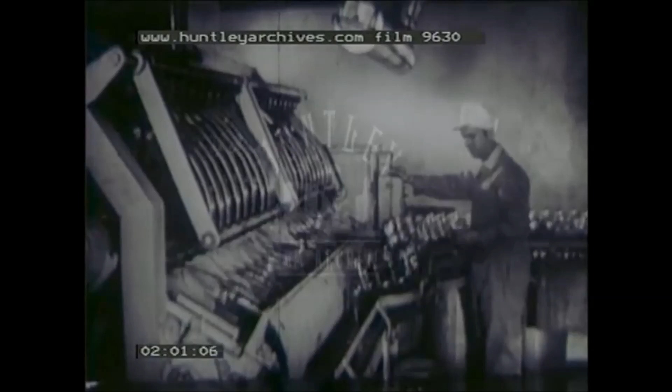The washing up that goes on in the house is magnified to huge proportions in places such as multiple dairies. Just as Mrs. Jones's washing up water goes down the sink, so the water that washed 10,000 bottles goes down the dairy drain. And so it is with industry in general.

Trade waste presents a stern problem for the public authority in charge of main drainage, for some of it is harmful and dangerous. From breweries, engineering works, chemical and dyeing works, the waste from the various industrial processes runs away down the factory drain. These flows from factories are larger than those from houses, but they all find their way into the same sewers.

When any building is erected, whether to live in or to work in, drains are laid leading to the sewer under the road.

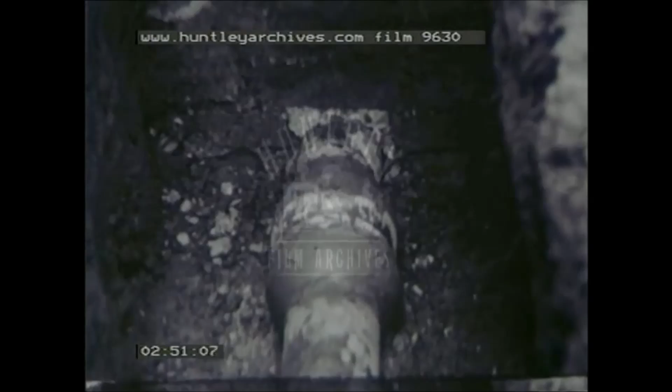Some sewers lie near the surface. Others are very deep in the earth. They run across country and under city streets, man-made rivers in tunnels of brick and concrete. Small local sewers flow into larger ones, and the wastewaters of a whole district move as tributaries towards one great stream.

As in natural rivers, the streams vary in appearance and rate of flow. At times of great activity, the sewage runs deeper and dirtier. On Mondays, there is the soapy evidence of wash day. From the first small drain down to sewers larger than a tube railway, like this one, the unwanted wastes of the world above the street are carried safely away.

In the county of Middlesex, the local authorities were faced with many problems. It became increasingly difficult to provide proper drainage facilities for the ever-growing population.

This is what happened to West Middlesex. Occupying two-thirds of the county, it contains within itself no less than 15 local authorities. The population in the area more than doubled in 15 years.

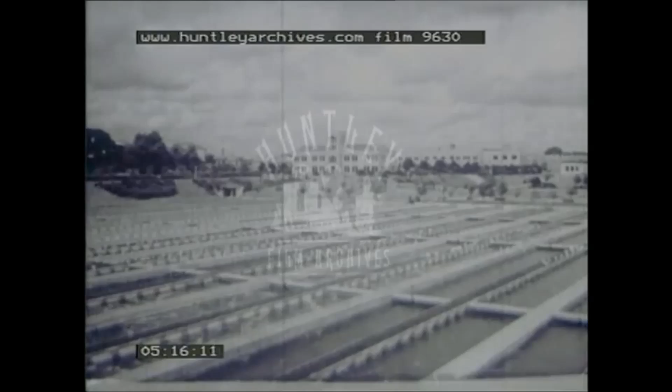Mogden, one of the largest and most modern purification works in the world, was completed in 1936. The average flow treated is over 60 million gallons per day. In wet weather, the works could take 600 million gallons in one day, a volume that would flood Hyde Park to a depth of 5 feet.

Sewers lie at different levels according to the contours of the land under which they run. One stream of sewage arrives at Mogden 60 feet below the ground. From the deep sewers, the flow arrives here and has to be lifted to the surface by pumps.

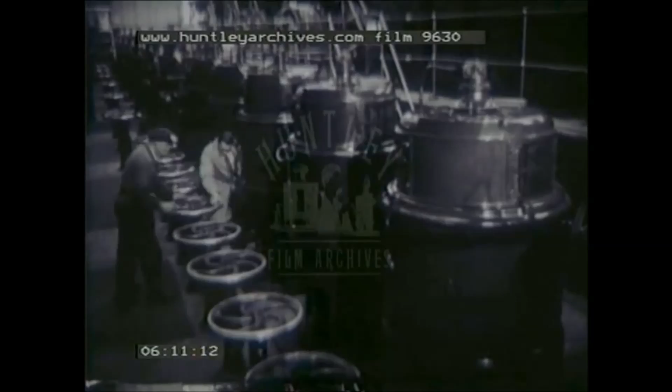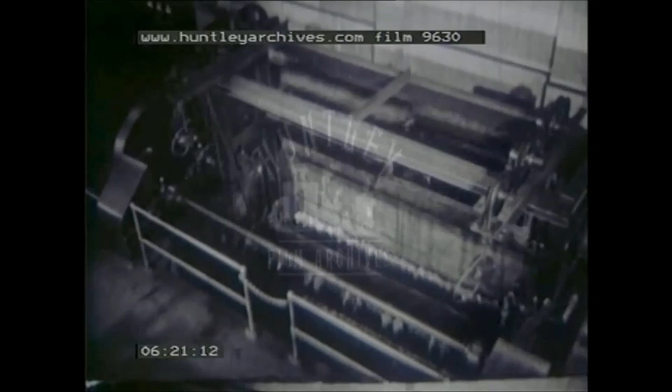It joins another large stream arriving at surface level, and both pass forward to the screen house. Here, rags and other large refuse which might choke the plant are sifted by screens. The electrically operated rake lifts the refuse to the top of the bars. Brushes sweep it onto a conveyor belt, which carries it into a machine where it's chopped into small pieces and passed back again into the sewage.

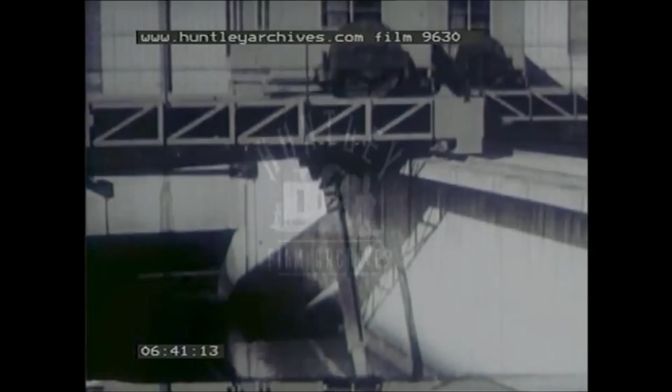The flow then moves on to grit chambers, where the speed of travel is reduced. This causes the sand and grit in the sewage to settle on the bottom in a fairly clean condition. The grit is removed from underwater by suction through a pipe traveling along the bottom, and is transferred to channels like this.

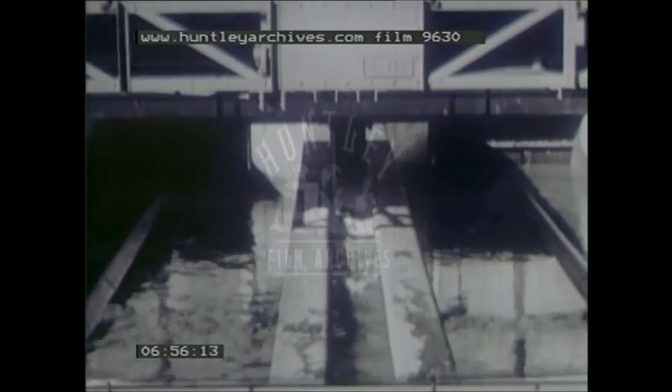60 million gallons a day. The sewage from a population of well over 1 million people now flows on for treatment.

Here, the first sample is collected for making chemical tests. This is necessary to ascertain the amount of impurity present in the sewage, and for the purpose of keeping a close watch on waste products discharged from factories.

In wet weather, the flow into Mogden increases in volume, but the works are constructed to deal with these heavy storms. Most of the rainwater that falls in streets in this area is carried away by surface water drains, straight into streams and rivers. But some of the more dirty rainwater is taken into the same sewers as ordinary sewage, and arrives here.

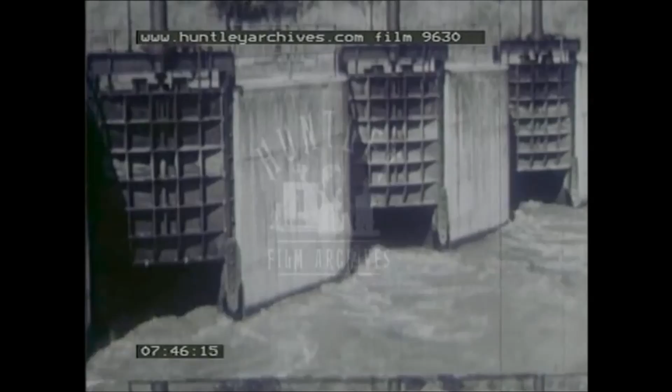The normal flow moves along the first channel. After heavy storms, excess water flows over the weir and is bypassed through this other channel for treatment in stormwater tanks.

These stretch away for a quarter of a mile.

The normal flow moves through culverts to other tanks known as sedimentation tanks. Here the sewage passes through very quietly, and just as mud settles on the bed of a river, so solid matter settles down on the bottom of the tank in the form of sludge.

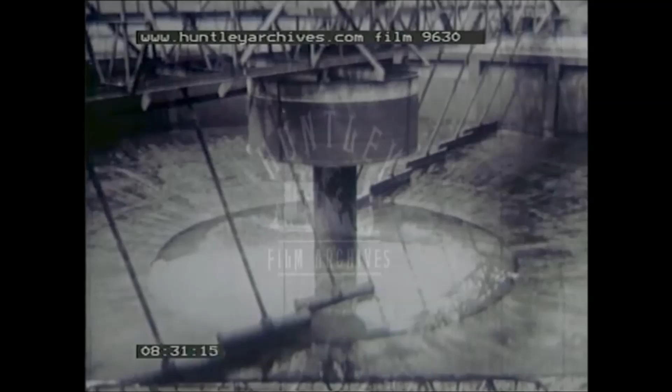This sludge is removed underwater by the machine. With an empty tank you can see what happens. The machine revolves slowly and scrapes the sludge at the bottom in towards a central well, from which it's pumped away for disposal.

The heavier solids are taken out in this first process, and now the water's passed forward into larger tanks, where the lighter solids slowly sink to the bottom. It's a gentle and leisurely process, and the machine which scrapes the bottom hardly ruffles the surface.

The large blade is lowered through the water and draws the settled sludge into hoppers at the end of the tank, and the sludge is pumped away.

These two stages of sedimentation remove rather less than half of the impurities from the sewage. Samples taken at this point show a liquid that is still turbid and dirty looking. Before the water can be discharged into the river without causing a nuisance, it must be made much more clear and pure.

To complete the purification, wonderful assistance is given by minute organisms, bacteria. The bacteria used are similar to those found in good garden soil.

Many years ago, sewage was purified on farms like this one, where it was distributed over large areas of land. But thousands of acres were often turned into unsightly, bad-smelling marsh.

Science and research brought improvements, and by about the year 1900, filter beds had been developed. In these beds, conditions are provided where friendly bacteria can thrive and make use of oxygen from the air to purify the sewage. This scientific principle is behind the activated sludge process, developed in more recent years.

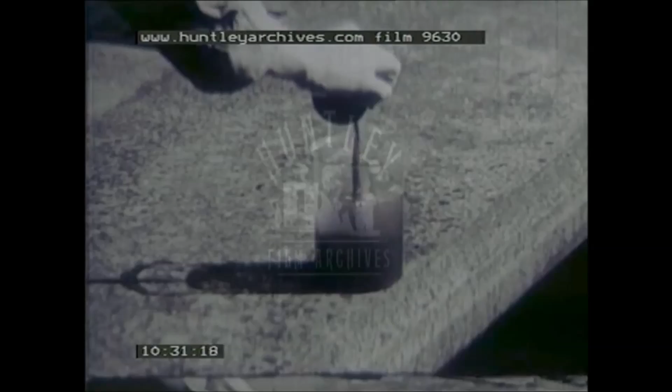Into the sewage is discharged a quantity of specially prepared activated sludge. Here's a small sample. A thimbleful contains thousands of millions of the living organisms.

In this mixing channel, this activated sludge is pumped into the sewage. The mixture then passes through channels, and it travels about a third of a mile in 8 hours, or about a yard a minute. During its journey, the mixture is continually aerated by small bubbles of compressed air, diffused from the bottom of the channels 12 feet below the surface.

When the bacteria have completed their work, the mixture flows into final tanks, where the activated sludge itself is separated from the purified sewage. In contrast to the wilderness of many old sewage farms, this plant is more like an ornamental garden.

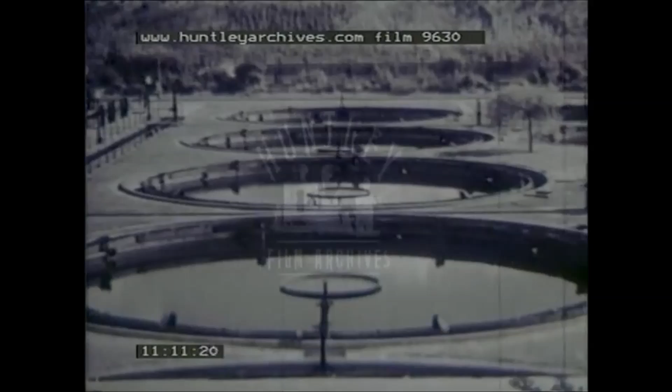The activated sludge settles readily in these tanks and is continuously moved underwater towards the center by a machine. The empty tank shows you how this is arranged. The sludge is discharged from the bottom and can be used again to purify more sewage.

The purified effluent flows over the weir around the top of the tank. More samples are taken at this stage. Nothing is left to chance. This final effluent is clear and sparkling.

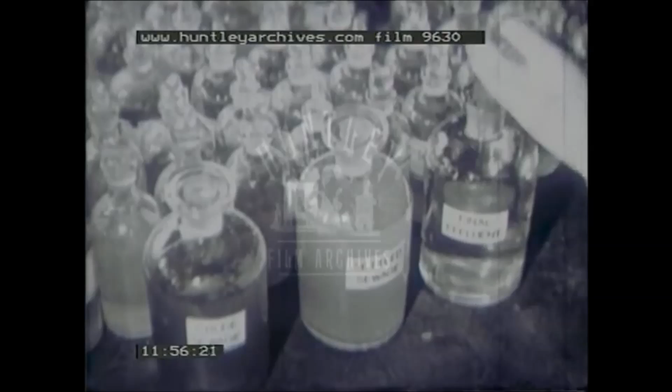Samples at various points are taken throughout the day and night, and some 200 are assembled for averages to be taken. Look at the difference between those 3 bottles. These average samples are sent to the laboratory, where a large number of tests are made and recorded.

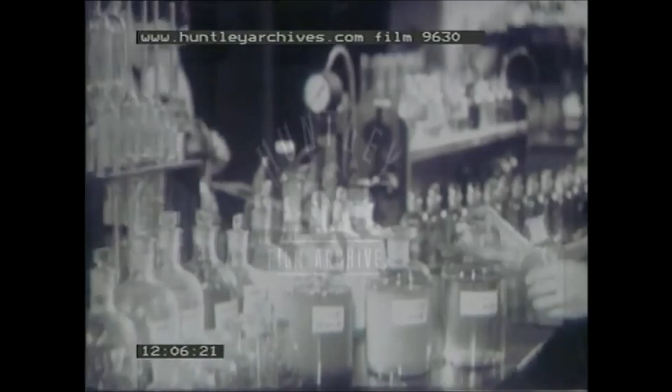For one of these tests, a sample is placed in an incubator at a temperature of 65 degrees Fahrenheit. It stays here for 5 days and is then tested again. The effluent, now practically pure water, is ready to flow into the River Thames.

The dangerous sewage has been cleansed at Mogden into a tributary of fresh, clear water. So clear that fish, which had been scarce before 1936, now fill the river, and the banks abound with happy fishermen.

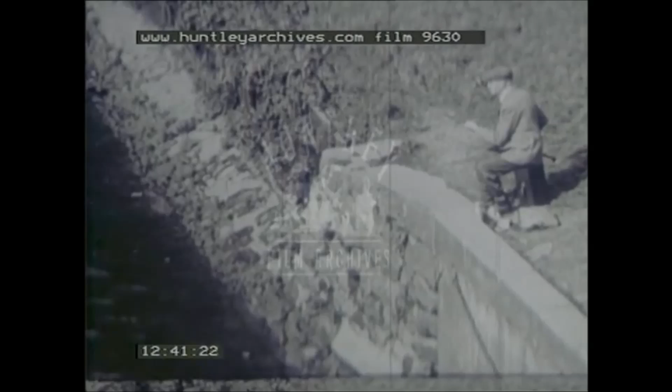Nothing is spoiled in the vicinity of the outlets. All the recreations and pleasures of this lovely river are carried on within a stone's throw of the conduits through which the final effluent flows.

But the work at Mogden is still only half finished. The impurities left behind in the form of a dark liquid sludge must be treated to make them harmless. The sludge is first pumped into covered tanks, where it's fermented at a temperature of 80 degrees Fahrenheit.

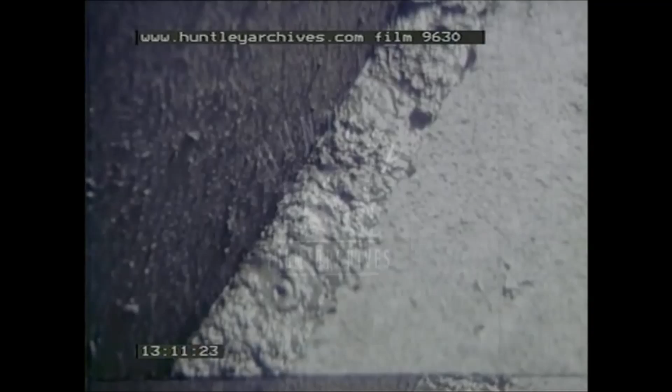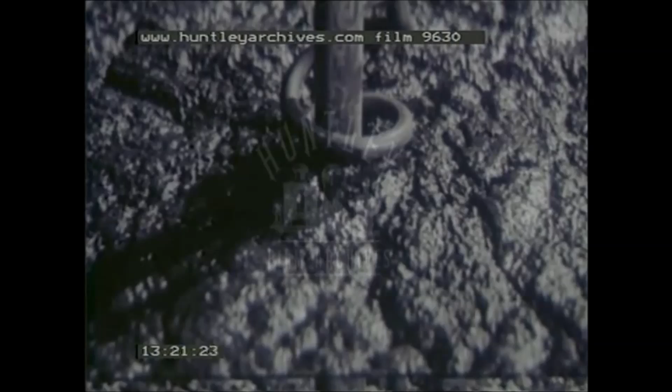Let's go into the laboratory and see what this process looks like. In this vessel, digesting sludge is heated by water circulating through the metal coil. The fermentation is brought about by bacteria, quite a different kind from those used to purify the sewage.

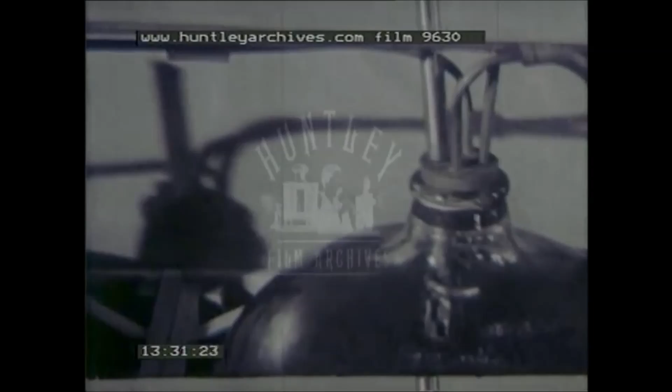During the process, gas is given off and is collected. The gas contains about 70% of methane, sometimes called marsh gas, which causes the will-o'-the-wisp on bogland. It has more heating value than coal gas.

You can see it burning in this incandescent mantle. Inside the tanks, the sludge is held for about 3 weeks, and from it is produced 1.5 million cubic feet of gas every day. This gas provides power and heat for the whole of Mogden's requirements.

Used in boilers, it heats these buildings. It's used in cylinders to drive all the lorries and vans and cars needed in the running of the organization. In the vast powerhouse, engines turn the gas into power, power which drives compressors supplying the air for the aeration tanks.

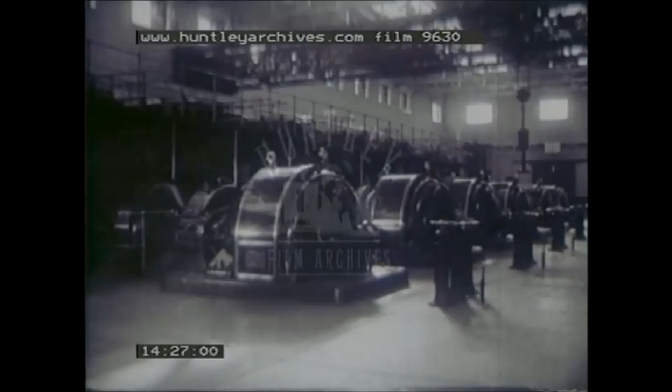In this way, the sewage is made to provide power to purify itself. Other engines drive large dynamos which produce electricity for the whole works. The electric crane is worked by it.

All the pumping stations use this power. And the outside machines used in treating the sewage are kept running by this self-produced electricity. It works the lifts, and even the clocks, and the floor polishers, and it provides light for the whole estate.

All this from sludge. The gas generated at Mogden from this waste product would serve the gas requirements of a town of 100,000 people. And what is left of the sludge after this process is still of value. By the power provided by itself, the sludge is finally pumped away through pipes 7 miles long to Perry Oaks.

There it remains in tanks until it can be discharged onto drying beds. Spread out in large areas, the sludge is left for a few months. It gradually dries into a substance not unlike peaty earth.

It makes an excellent fertilizer, and local farmers buy many thousands of tons a year to spread on their fields to improve the crops. What might have been a source of danger and contamination goes back to nature, harmless and productive, through these revolutionary processes of modern times.

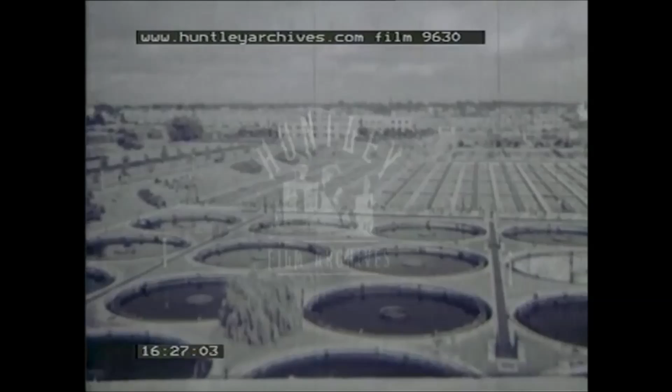This great undertaking belongs to the ratepayers and is operated through their representatives. The sewers and works, which help to maintain the health and comfort of the residents of West Middlesex, cost over £5 million to construct and require a large sum to operate. But all this expenditure works out at less than twopence a week for each resident in the area. A small price to pay for a great service.

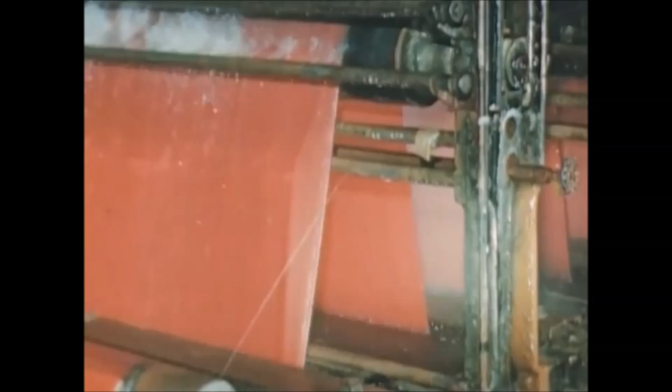From the beginning of time, our rivers, lakes, and the seven seas have been arteries of transportation. Factory sites may be chosen because of the availability of sufficient clean water, a vital factor in many industrial processes. And most important of all, our natural waters are the major source of our drinking water. In fact, almost invariably, man settled near to water.

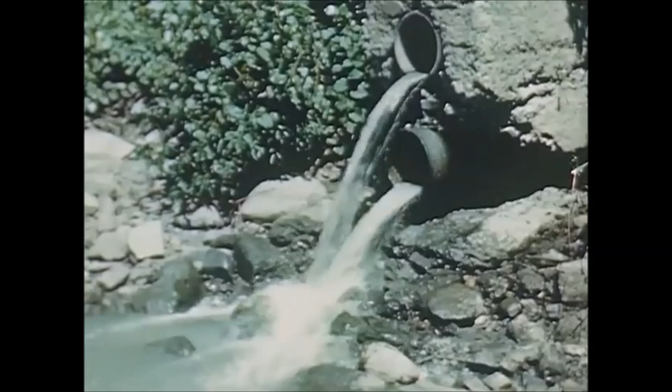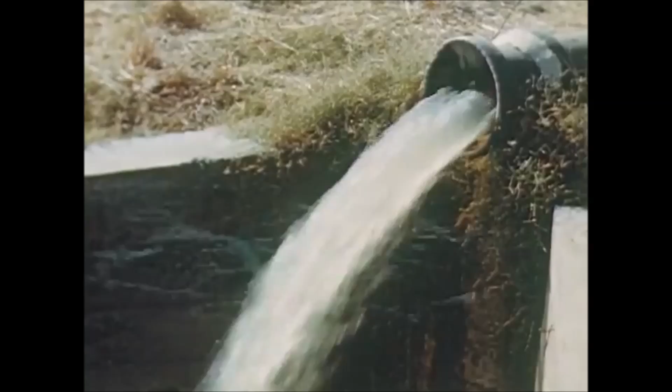He needed water for his domestic use, for food production, for his industries, and for transportation. Being near water, his communities dumped their waste matter, their sewage, into the streams for easy disposal, thus creating the serious problem of pollution, a problem which has grown increasingly serious as communities have increased in size.

We pride ourselves on our high sanitary standards, yet we deliberately make open sewers of our waterways. The clean, clear waters that were once so friendly and useful become greasy and ill-smelling. Scum forms on the surface. Floating refuse lodges on shores filthy with layers of rotting wastes. Once attractive residential districts have declined in value. Bathing beaches and swimming holes are closed due to the germs of waterborne diseases.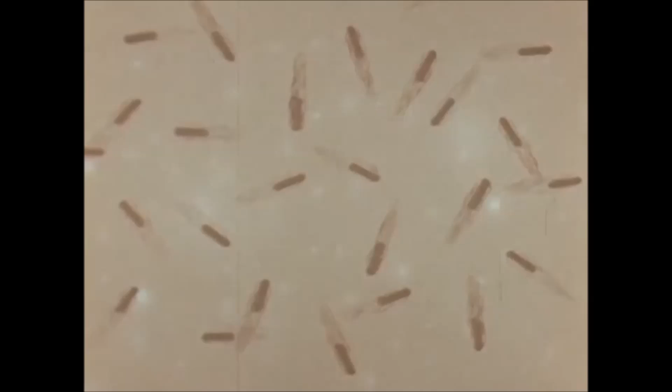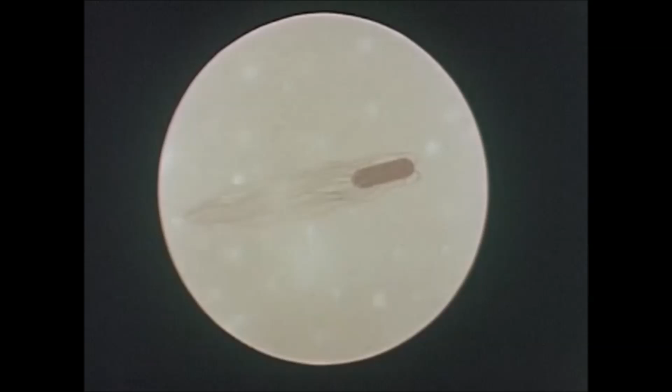Typhoid fever, cholera, dysentery, and other intestinal infections thrive in polluted water. These deadly sewage bacteria are frequently carried long distances by flowing streams, sometimes contaminating drinking water supplies and rendering them dangerous to public health. Remember that three-quarters of our communities take their water from lakes and streams. Livestock pastured near polluted water may become infected.

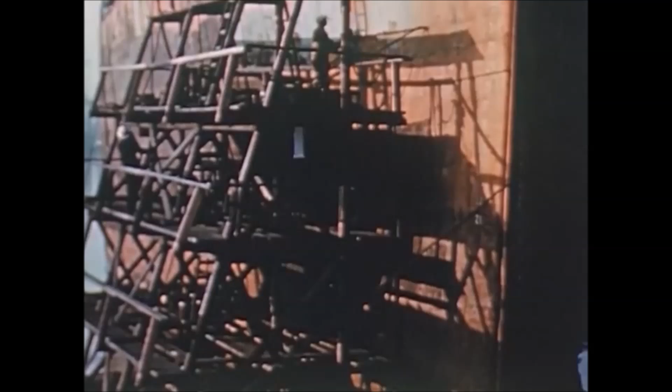Germ-infested shellfish taken from contaminated waters are a menace to health. Sewage pollution threatens many a sportsman's paradise with destruction, or has already destroyed it by the pollution of our streams. Polluted waterways hinder shipping, befouling and rusting boats. Entire communities have suffered from hydrogen sulfide fumes from polluted water. These fumes are not only disagreeable, but are also destructive to the paint on buildings.

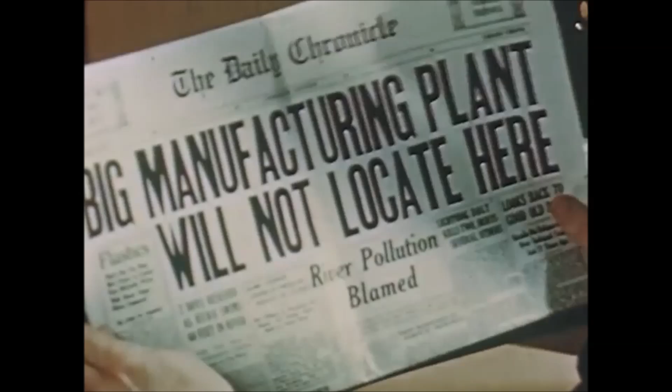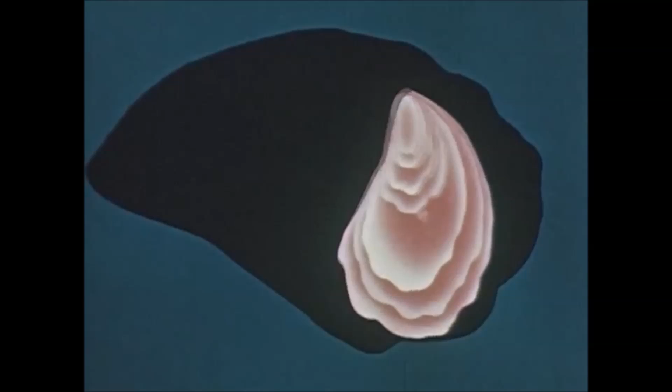Industrial plants needing a plentiful supply of clean water will not locate along polluted streams. All of these calamities are caused by the tremendous quantities of sewage and other wastes constantly poured into our inland and coastal waters. And oysters more than doubled in price because of pollution. At one time, millions of pounds of salmon were taken each year from streams along our North Atlantic seacoast. Today, pitifully few of these streams yield any of this valuable food and game fish.

In numerous places along our coasts, sea bathers are forced to travel many miles to find waters not contaminated. In one West Coast area, an estimated 54 million additional miles are traveled each year by people whose home beaches are polluted. A beach resort on an eastern shore, which cost $5 million and gave pleasure to thousands of people, was made unfit for use as a resort because of pollution.

The recreation and economic losses due to pollution affect the lives of every one of us. The United States Public Health Service says pollution of our natural water costs the country more than $100 million annually, exclusive of many important intangible losses.

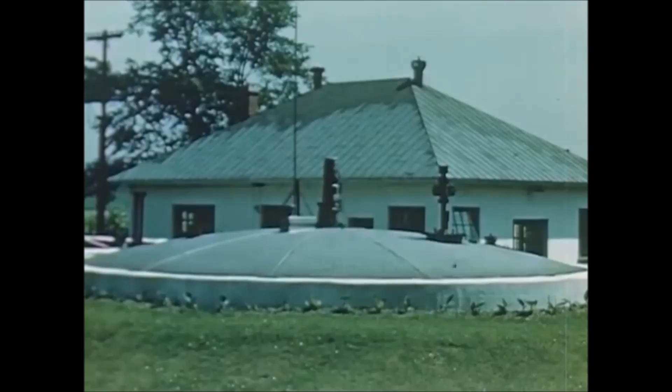All of these losses can be avoided through sewage treatment, an economical and effective process. Raw sewage, the collected wastes of a community, is channeled into the plant. Modern, efficient treatment plants, employing processes developed by sanitary and consulting engineers and equipment manufacturers, remove the polluting materials. The exact process used depends upon various factors, but the final product is in all cases the same: clear water which can be turned back into the stream without harmful effect.

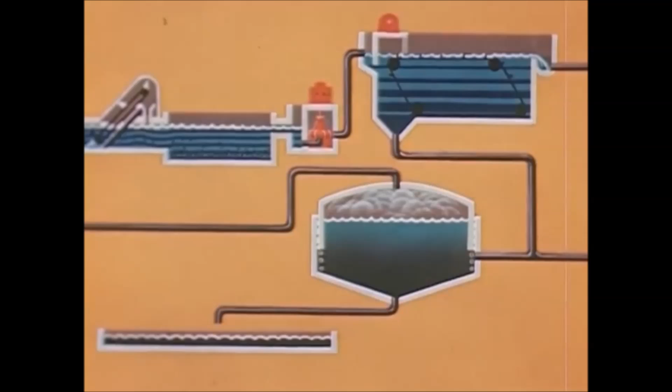Complete sewage treatment consists of two major steps: primary treatment and secondary treatment. The primary treatment includes the mechanical removal of solids which will settle out. It starts when the raw sewage enters the plant. In a typical plant, the sewage first flows through a mechanically cleaned bar screen, which removes any coarse material that might damage the pumps or other equipment.

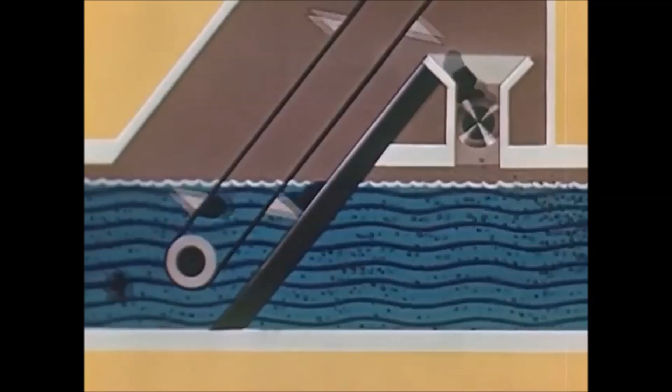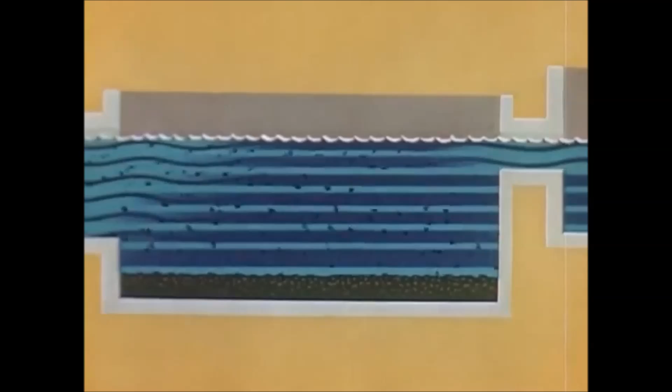The sewage then passes slowly through the grit removal basin, allowing the grit to settle out. From here, the sewage is lifted into a settling tank by pumps. The pumps are usually driven by electric motors such as these. Settling tanks vary in design, but the purpose is the same.

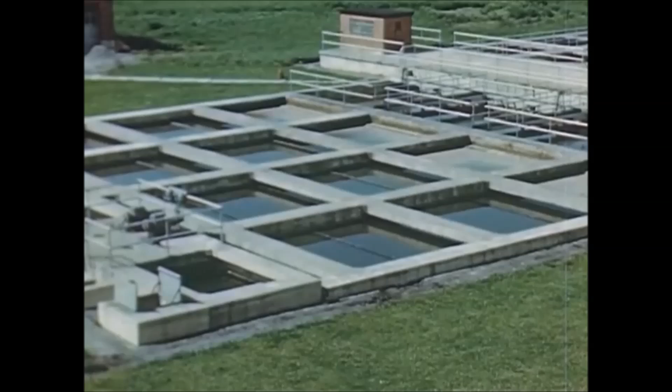Here, the speed of flow is greatly reduced to let the suspended organic matter settle to the bottom. Sometimes chemicals are added to help sedimentation.

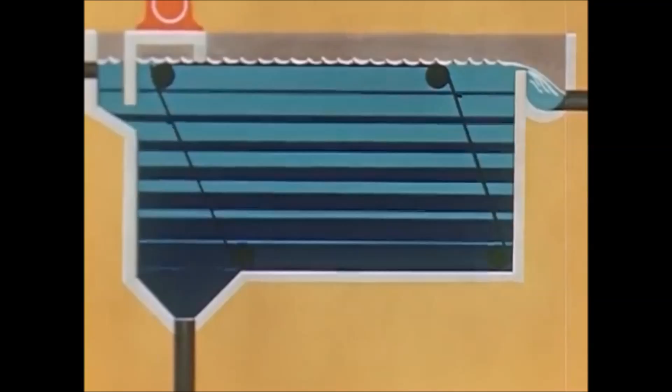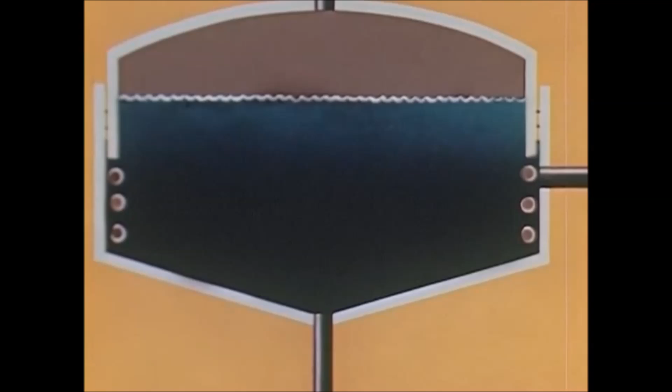The settled matter, called sludge, is pumped to an enclosed and heated digestion tank. In the digestion tank, helpful bacteria which thrive without oxygen reduce the sludge to a useful humus-like residue. This process generates a gas that may be burned to furnish heat or power to operate parts of the system.

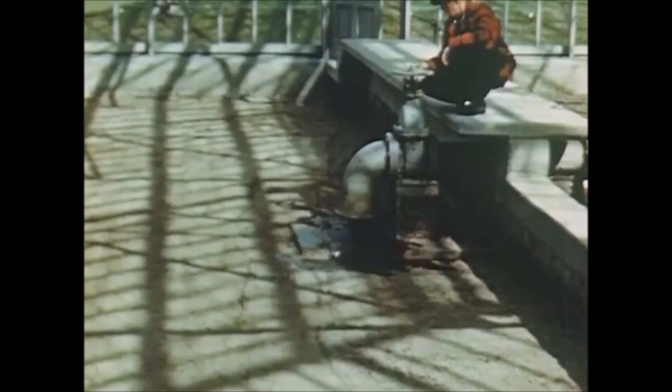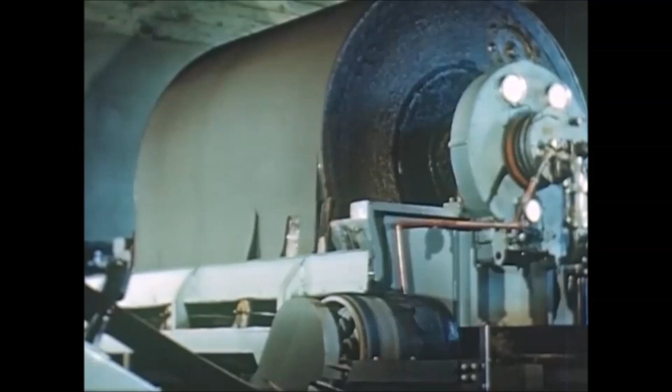After digestion, the sludge is dried or dewatered. This may be done by spreading it on sand beds to dry by evaporation, or it may be more rapidly dried by mechanical processes. The dried sludge is useful as fertilizer, but unless heat treated, it should not be used on vegetables that are eaten raw.

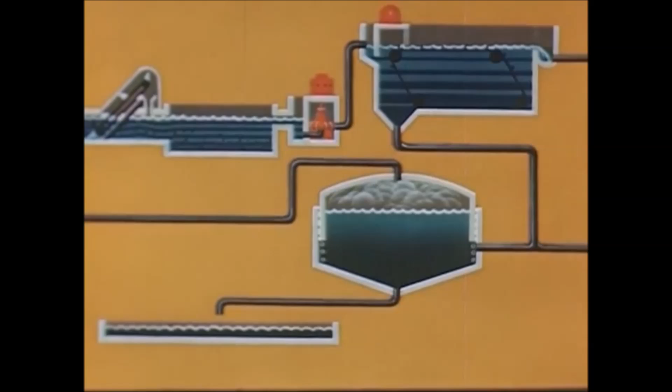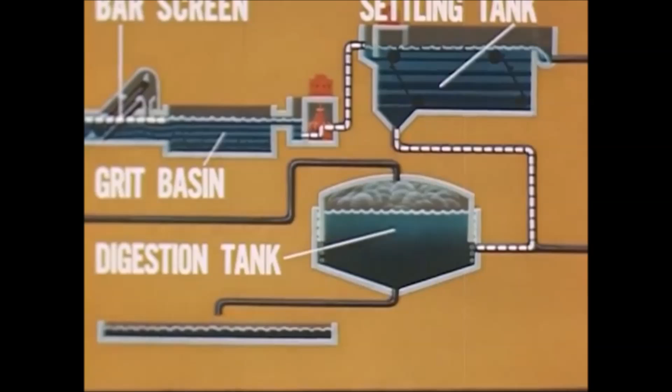These steps then comprise primary treatment: screening, grit settling, settling of solids, sludge digestion, sludge drying, and sometimes chlorination of the effluent.

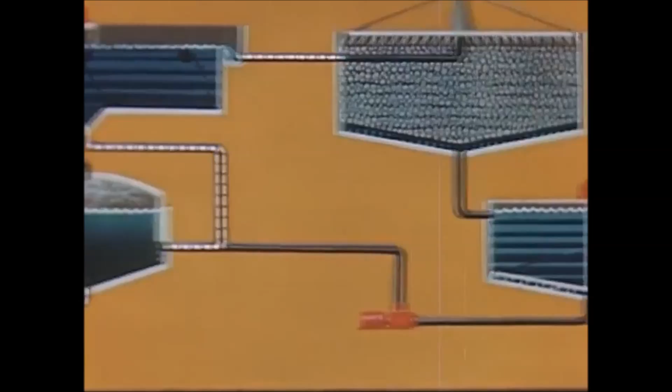The secondary treatment includes the biological transformation of any organic matter remaining in the liquid that was drawn from the top of the primary settling tank. This liquid is treated in a filter which trickles it over rocks on which live bacteria that thrive in the presence of oxygen.

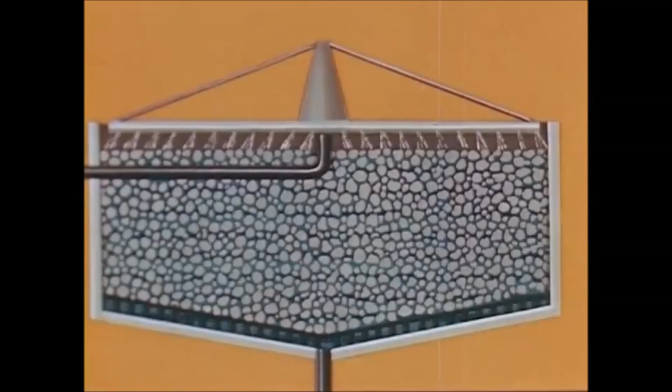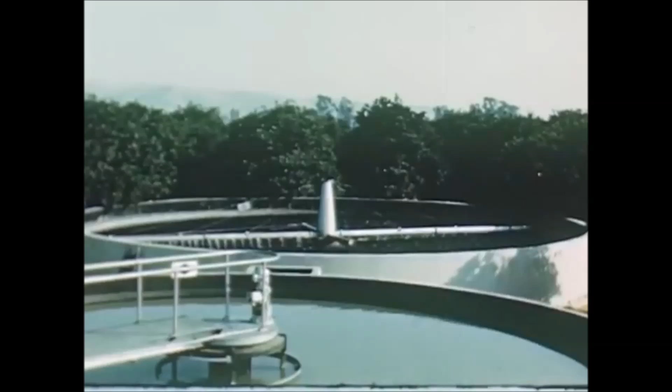This may be done by any of several filtering methods which allow these oxygen-loving bacteria to oxidize the remaining organic matter and coagulate the solid matter into clumps which will settle out.

Or it may be done by the activated sludge process, in which large quantities of air are blown through the liquid to which a bacteria culture has been added.

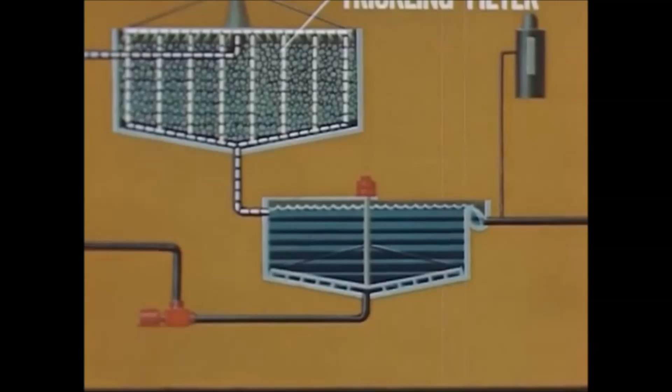The effluent from any of these processes may be drawn off into a tank for final settling. The remaining liquid, after any further necessary filtering or chlorination, is a clean effluent which can be discharged into a stream or body of water with almost all the dangers of pollution removed.

Of course, to be safe for drinking, surface water from any source must be treated further in a modern water supply system.

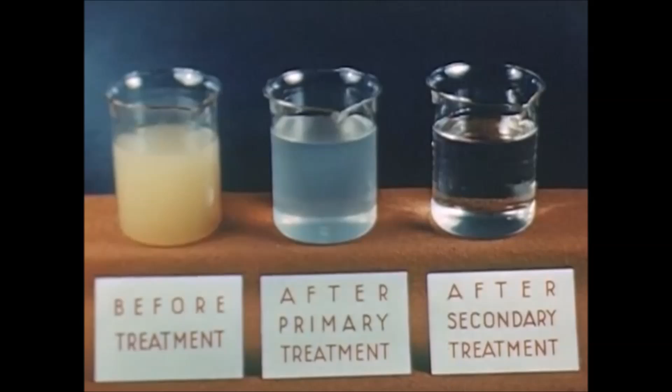This successful transformation of raw sewage into clear, clean effluent is accomplished in specially built, especially equipped, and efficiently operated plants that have been developed largely within the past 50 years.

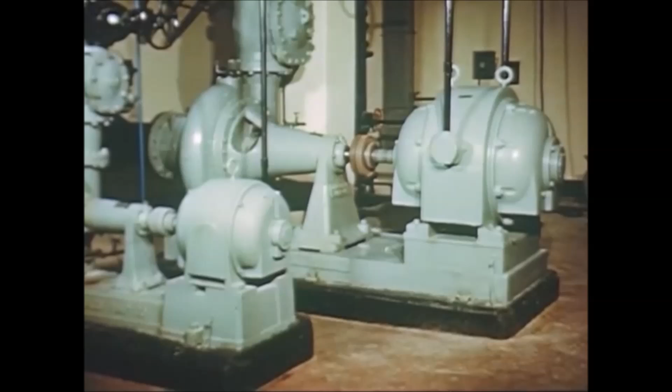There were only 60 such plants in 1900. By 1910, there were 300. Their numbers grew until by 1945, there were over 6,000 plants in use.

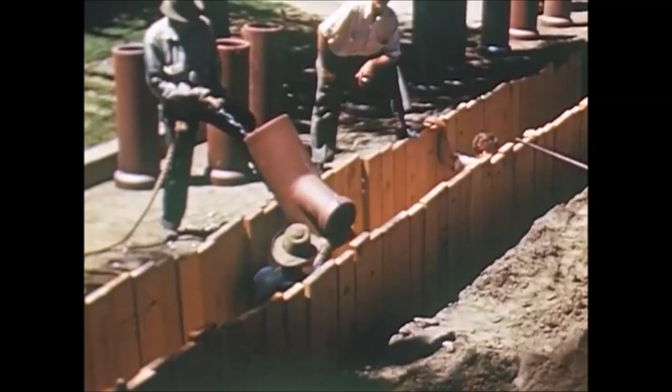But at the same time, thousands of other communities were installing sewers for the first time and turning their untreated wastes into our waterways. So today, our public health service officials estimate that there is a pressing need now for more than 10,000 new plants. And in addition, a large number of the existing plants are inadequate.

This great need for efficient sewage treatment exists in almost every community. So long as we ignore this need, pollution will menace health, rob us of food, reduce property values, destroy wildlife, and add greatly to the difficulty and cost of providing safe city water supplies.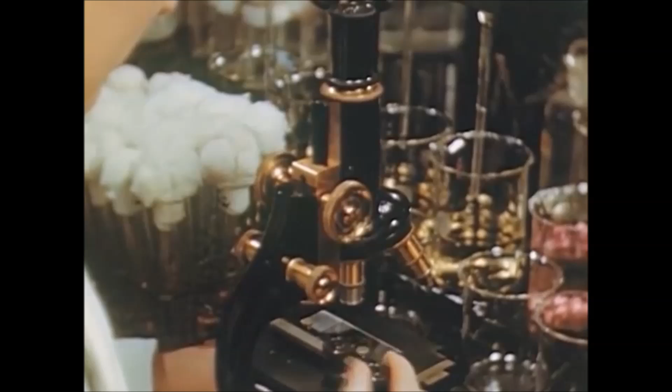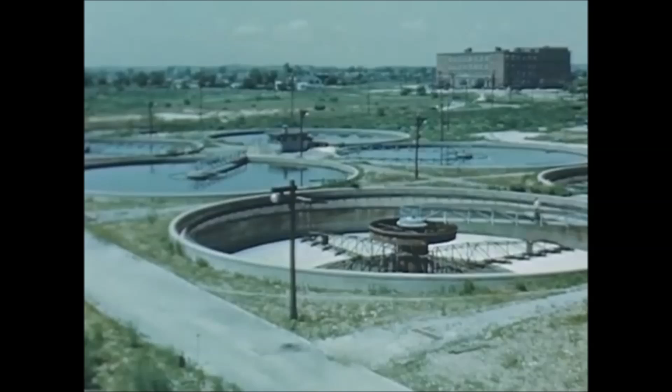Adequate treatment of sewage will eliminate these dangers, handicaps, and losses from pollution. Cooperative planning by the communities in your area will be required to coordinate and develop the broad programs needed for adequate sewage treatment.

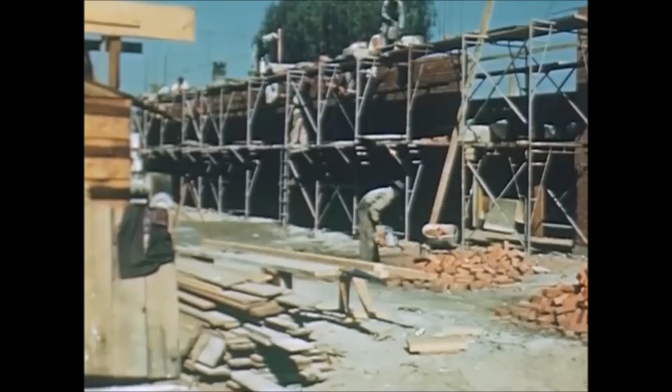Authorities estimate that on a national basis, the saving of the $100 million lost annually as a result of pollution would very nearly pay the entire cost of the construction program.

The result will be the return of our inland and coastal waters to their original natural state, so that they may again be unhampered in performing their natural functions in our industries, in supplying our food, providing recreational opportunities near home, the conservation of our fish and game, and caring for our welfare in many different ways.

Then the voice of the waters, the surging surf, combing breakers, the tumbling, gleaming cascades of mountain torrents, the placid, deep-flowing rivers, the gentle lapping at the shores of inland lakes, will again find vibrant, joyous expression in the merry bubbling of the brook, and renew the age-old prophecy murmured by its clean, clear water.